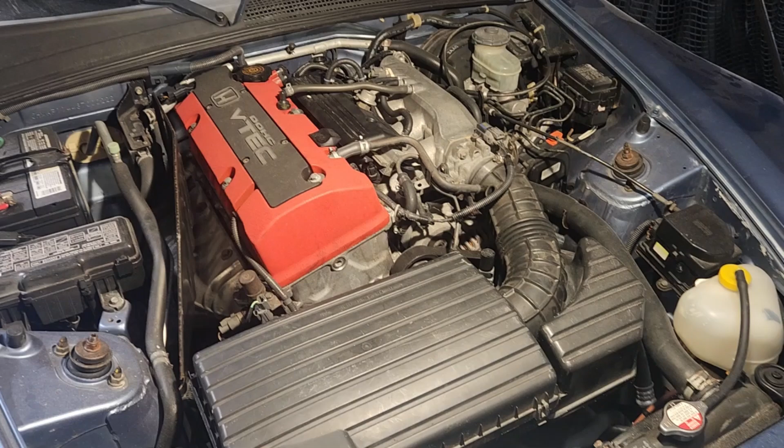This is what a stock S2000 engine looks like. I like the idea of keeping everything looking stock, and if you have performance upgrades, it's cool to hide them. Look at what I got inside the airbox.

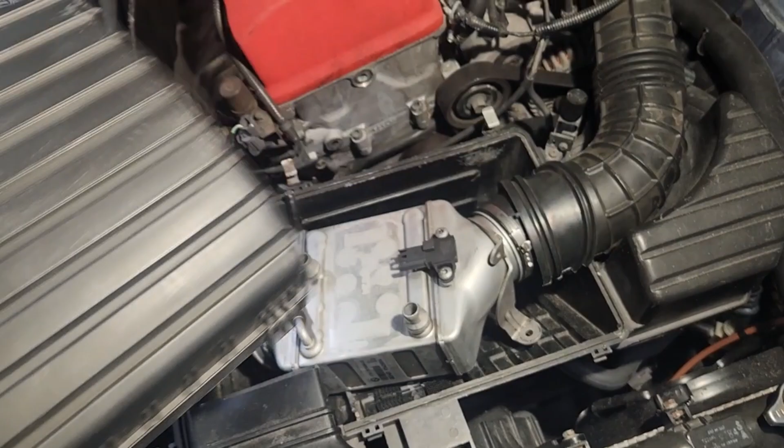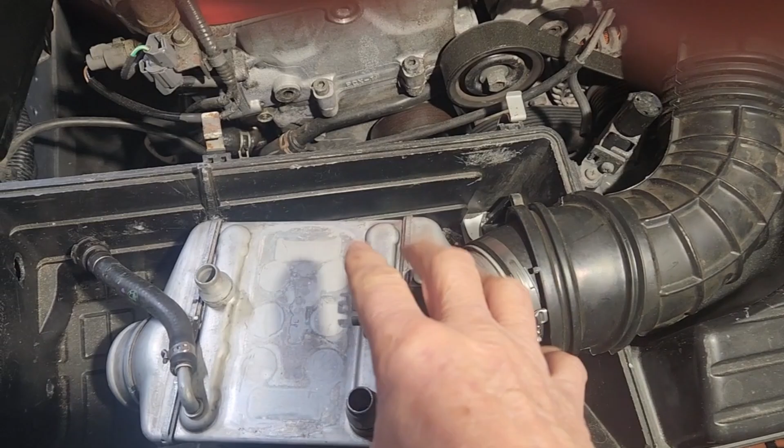That's an intercooler - that BMW intercooler I bought. The output lines right up where the intake tube goes, there used to be an air filter here, and the intake lines up pretty good with where my charge pipes could come from the rear.

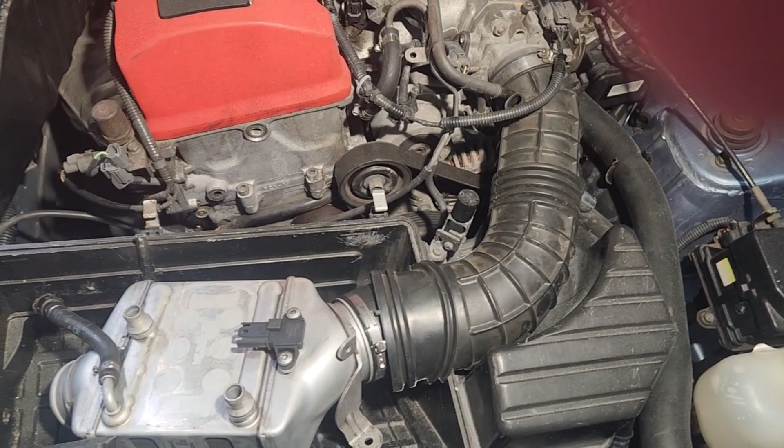Get some water into here, and obviously this hose can't hold pressure. I don't think it can hold 6 psi. Maybe it can, but maybe we could run a pressure hose inside that, a kind of high pressure hose inside the stock air intake hose. I think it'd be really cool to have the whole thing be stealth.

The question is, is this intercooler good enough? It came off a twin turbo, I think a V8 BMW from like 2011, and there's two of them, one for each side of the engine. The engine was rated for 400 horsepower, so BMW used that to cool 200 horsepower worth of air each. And I'm looking at something a little over 300 horsepower. So is that intercooler undersized?

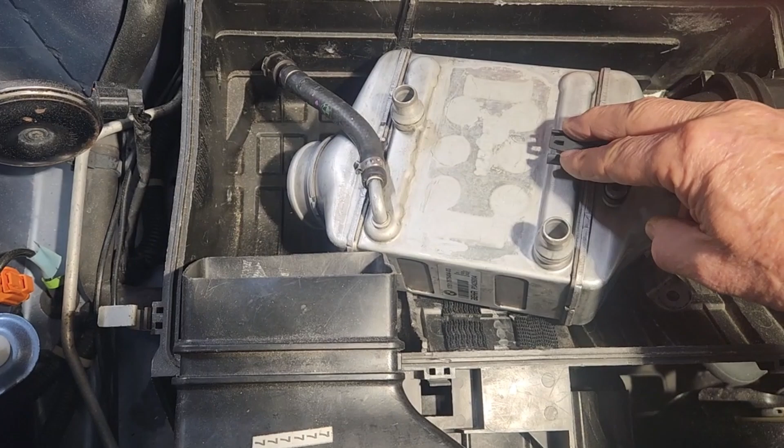It also comes with a sensor built into it - that'd be kind of cool. That's an integrated air temperature and boost pressure sensor. I've got the temperature part figured out, but I can't get it to register pressure. When I put voltage on the power pins and look at the pressure output, I get 2.5 volts, but it doesn't change with pressure. If anybody knows more about these things, please leave me a message.

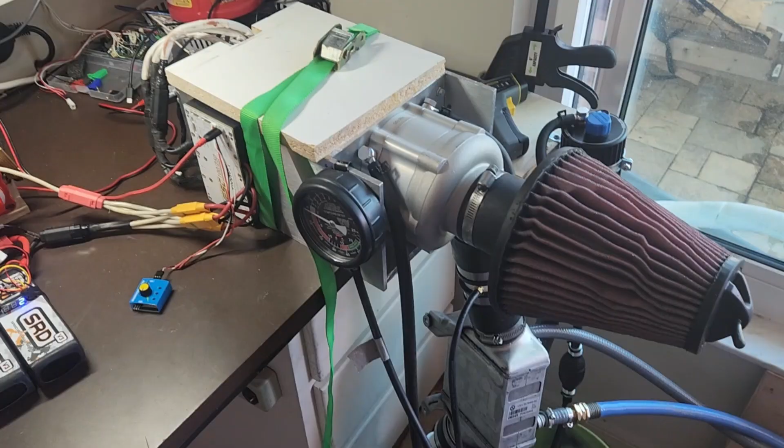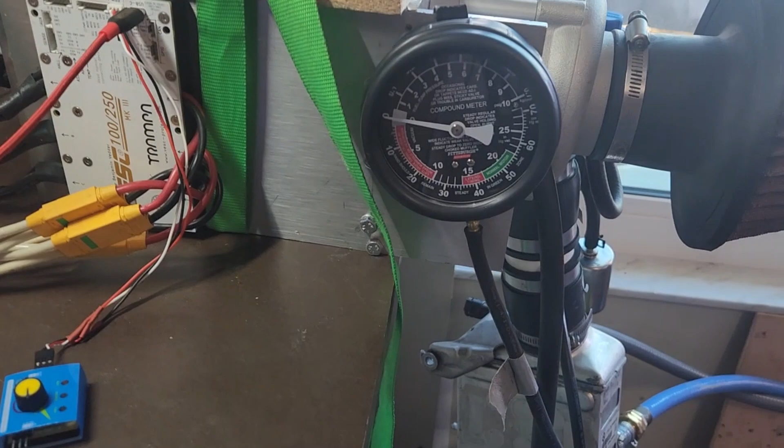So I kind of want to talk about the intercooler some today. Here's my current test setup. I've got the intercooler down there, I've got water going in it, I'm measuring the pressure above and below the intercooler, and I'm measuring the temperature above and below it. I got a boost gauge that's a $13 Harbor Freight boost gauge - I don't totally trust it, so it may be a little bit off.

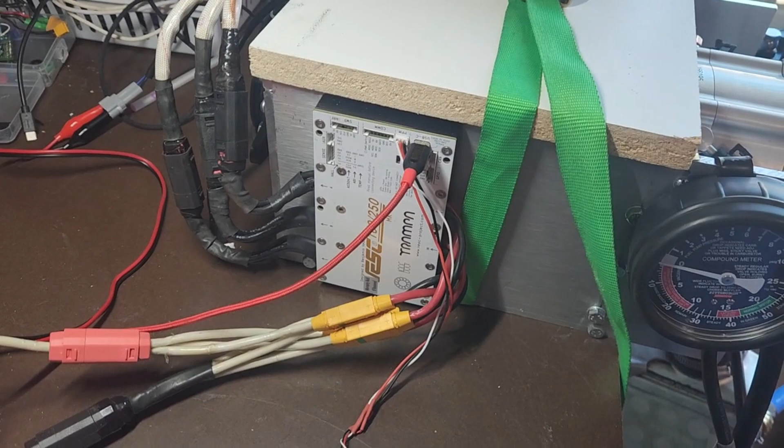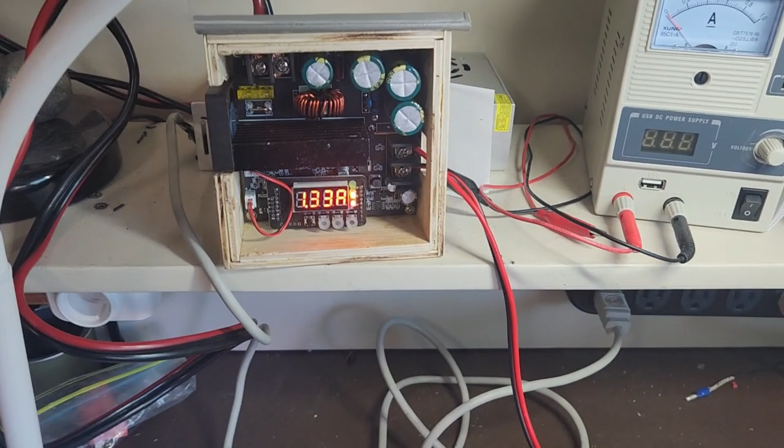Got the VESC controller by Trampa. I got a switch that pre-charges automatically. I've got a little battery charger up here that stays hooked up to the batteries all the time. I thought I had the perfect solution for the battery charger in the car, but this is not as great as I thought it was.

This is the data I got from that quick test. I was running this on 16 batteries in series - I'm going to run either 18 or 20, so it should get a little better than this. 5.5 pounds of boost.

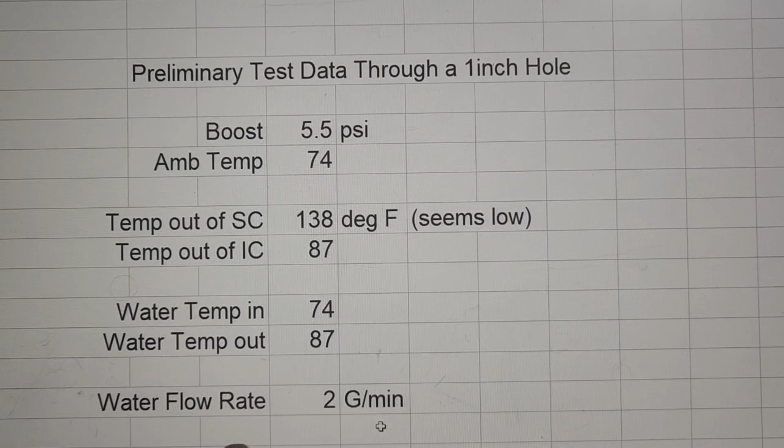The air temperature coming out of the supercharger is 138 degrees - seems a little bit low to me for that amount of boost. The temp out of the intercooler was 87, so it did a good job bringing it down. The water temperature going in was 74 and it came out at 87. The flow rate was 2 gallons per minute. Obviously, if we got more flow - this is a pretty slow flow rate - the water wouldn't have heated up as much, it would come out colder and would have been more effective at reducing the temperature. But it worked pretty good anyway.

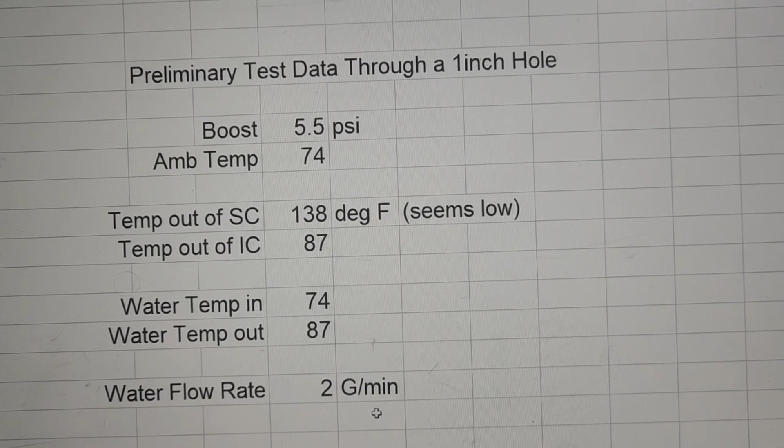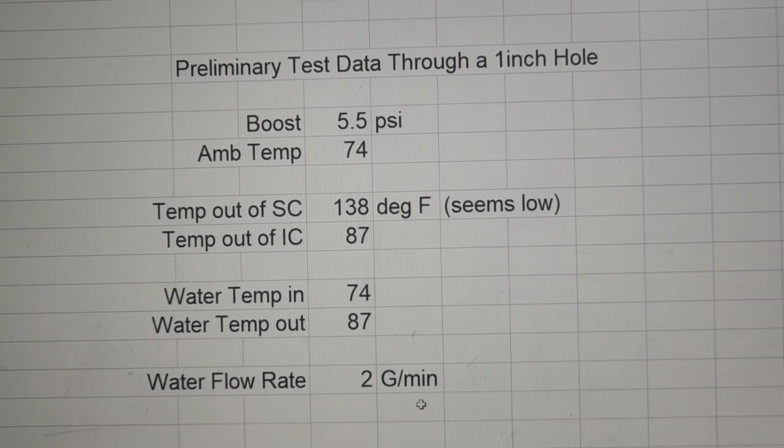If you noticed at 2 gallons a minute, if I just had 1 gallon of water in the system, it would take 30 seconds for that water to circulate all the way through the intercooler and back around. So, having a heat exchanger out in front of the radiator isn't that important, because for short bursts of power, the water's never going to get around to that front intercooler, and I'm going to be using all cool water. Then you can have a few minutes for that water to circulate to get it cooled off again. Or we can go with a higher flow rate very easily and get this thing down, but I'll need a bit more water storage or a better front intercooler.

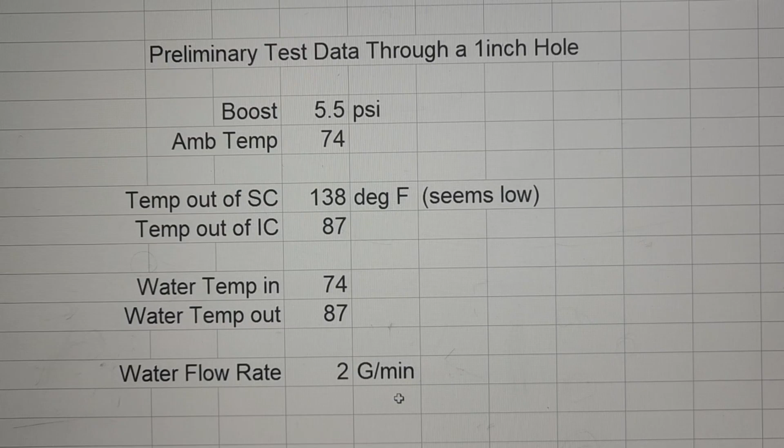So this summarizes the intercooler performance. The air was 57.5 degrees hotter than the water inside the intercooler, and it dropped that down 51 degrees, which is an 89% efficiency. So the best it can do would be to drop the air temperature down to the same temperature as the water, and I'm saying that's the average water temperature. It did that within about 10 or 11%. Really pretty doggone good. And it had a pressure drop of 0.4 psi across it.

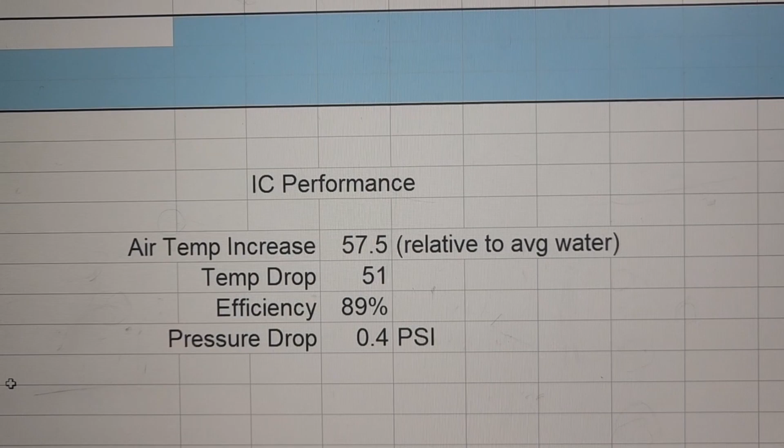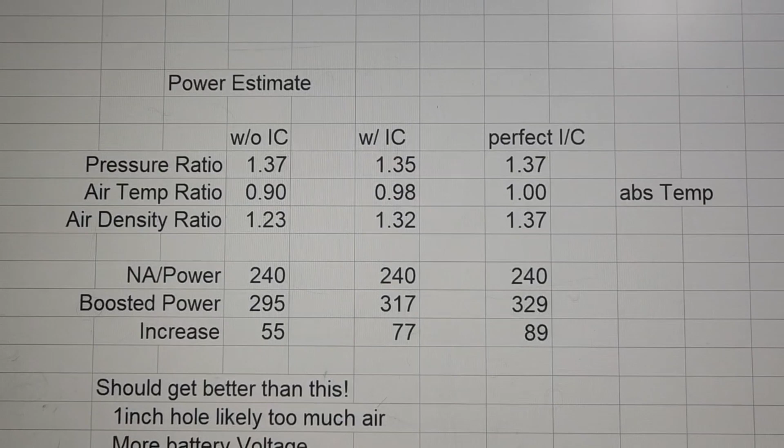Well, what we care about for the supercharger is the density of the air entering the engine. We want to get the most oxygen flowing to the engine as possible. And the more oxygen we have, the more fuel we can have, the more power we can have. So it's not so much boost pressure, it's density of the oxygen at the input of the engine.

So what is the air density? Well, the pressure ratio at 5.5 pounds of boost, that's a 37% increase in air pressure over ambient. But air temperature also affects the density. Hot air is less dense than cold air. So without the intercooler, with that air temperature, we're going to lose 10% of that density due to the air temperature. So we don't get that number, we get the product of those two numbers. We get a 23% increase in the air density coming into the engine, which basically is a 23% increase in power. Now you add our intercooler to it, and we lose a little bit of pressure ratio because we lost 0.4 of a psi.

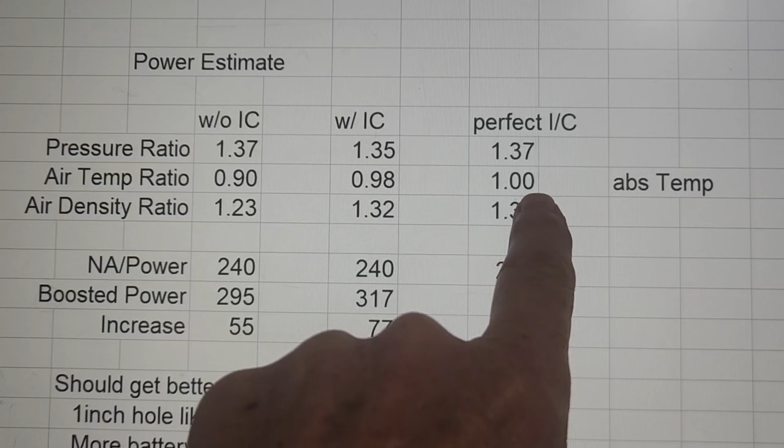But the air temperature ratio is much better. The intercooler dropped the air temperature down, and we end up with a 32% increase in air density at the engine input. And then what if you had a perfect intercooler? Well, the pressure ratio would be the same as without an intercooler because they had no pressure drop. The air temperature ratio, or density ratio, would be 1-to-1, right? Because the temperature would be the same as what was going in. And you'd get the full 37% increase in power.

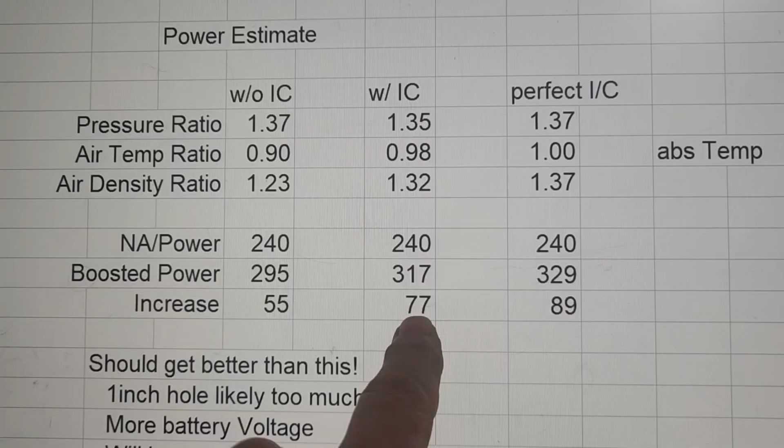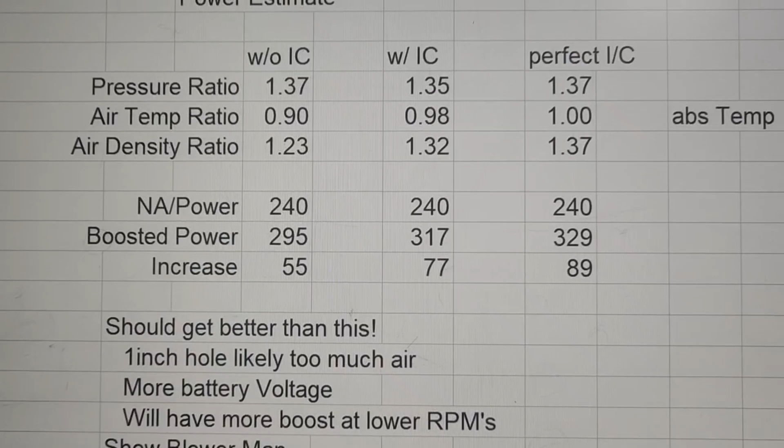So here's some rough numbers. Without the intercooler, we can think about a 55 horsepower power increase. With that intercooler, probably 77. And with a perfect intercooler, 89. I think this intercooler is good, and the fact that it fits in that magic spot in the old air box, I'm inclined to use it. If I could run more water through it, this number would go up a little bit, and then we're getting kind of close to a perfect intercooler.

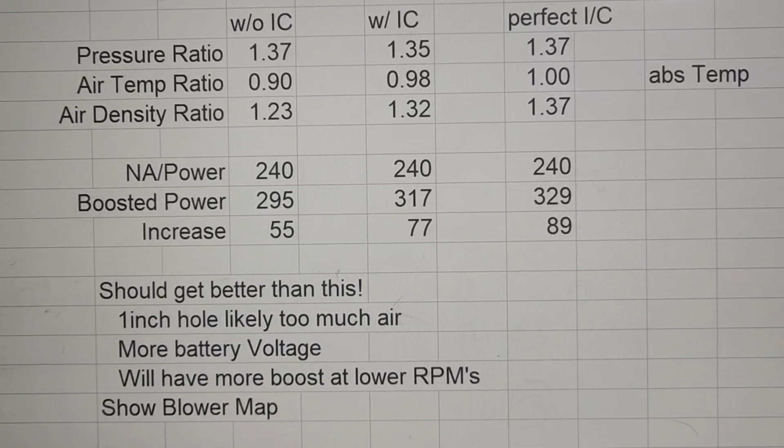Now, some overall thoughts on these performance numbers. I think the 1-inch hole is flowing more air than this engine actually takes, so I think these numbers are probably low. I'm going to add more battery voltage. And the other thing to think is that this is only the numbers at maximum power. I'm going to show you the blower map in a second, and I think you'll see that the performance increase is going to be better than this at lower RPMs.

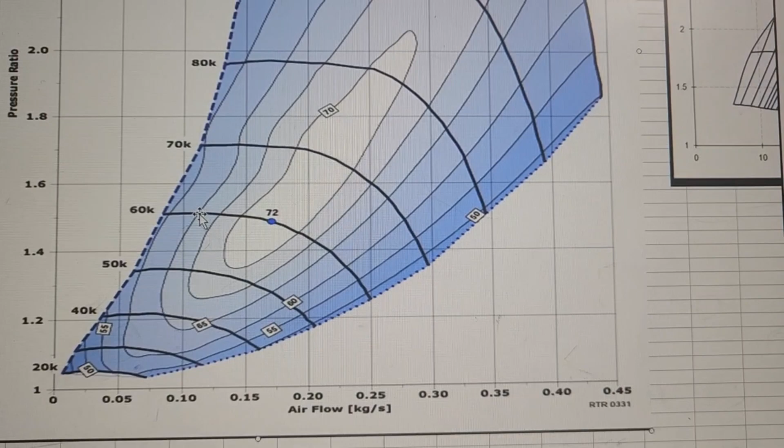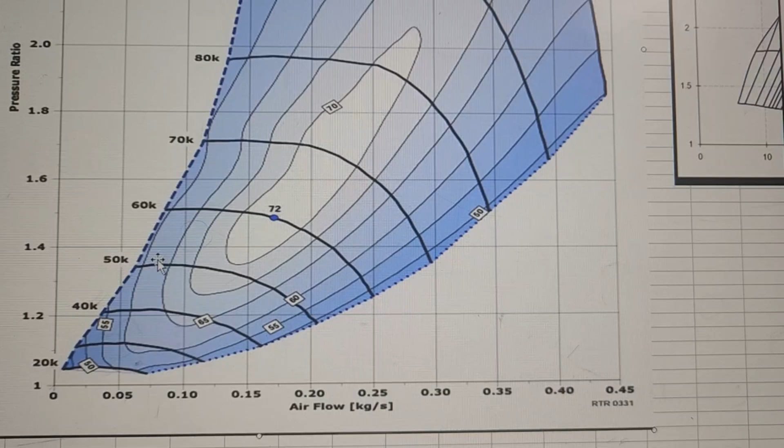Once I get down to maybe 3,000, I don't want to hit the surge line, so I'm going to start bringing the supercharger RPM down so that at low RPM I'll follow a curve down like this. So some thoughts on where I think this thing's headed.

The early electric superchargers, like the Torqamp, they were power limited. The motor did not have enough power to flow the air and the pressure at the same time that the engine needed. Corky Bell's got a great book, and I've got it.

He talks about the power that the electric motor needs is the airflow times the boost, and there's a constant in there. So the problem with these early Torqamp kind of guys is that when you want, say, 6-7 pounds of boost, once you hit a certain airflow, they just don't have enough power to keep pushing it. So they work great at low RPMs, but once you get a lot of airflow, the motor runs out of poop and the boost drops off.

That is not my problem here. This motor has more power than I need. I think that last test I was probably in the 8 or 9 kilowatt range. The motor was probably putting out about 10, 11, 12 horsepower. This motor will do better than that. This motor could probably do 15, 16, 17 horsepower. So I'm not power limited, and the batteries are not power limited.